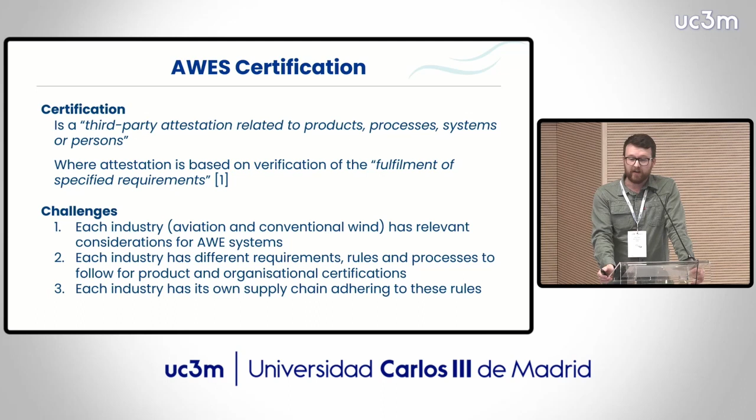So if you're drawn from each supply chain, you're likely to come into contradictions and different processes. So we wanted to compare side by side and understand where they are similar and where there are gaps. All of this is part of Work Package 5 of the HAWK project. Some of you might have already heard of the HAWK project. It's funded by the Sustainable Energy Authority of Ireland. I'm a collaborator on the project. Airborne Wind Europe are as well, and it's led by teams in the University of Galway and CTL in Ireland.

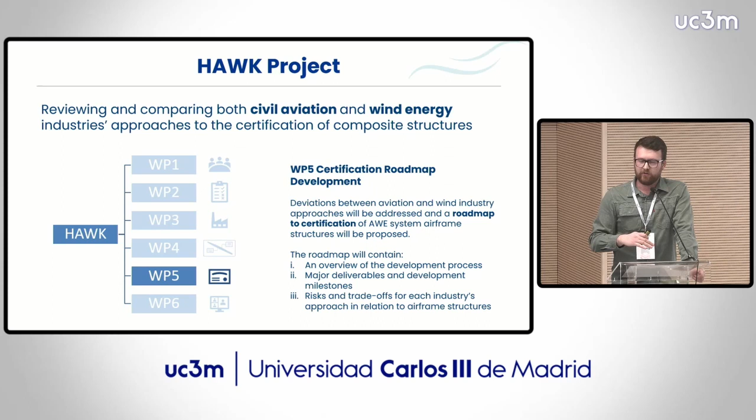As part of this work package, we set out to create that roadmap to certification, look at what the major deliverables and milestones are, and identify the risks and trade-offs for each industry's approach. But we're really narrowed in on the composite aerostructures for rigid wing aircraft. That's the overall focus of the project.

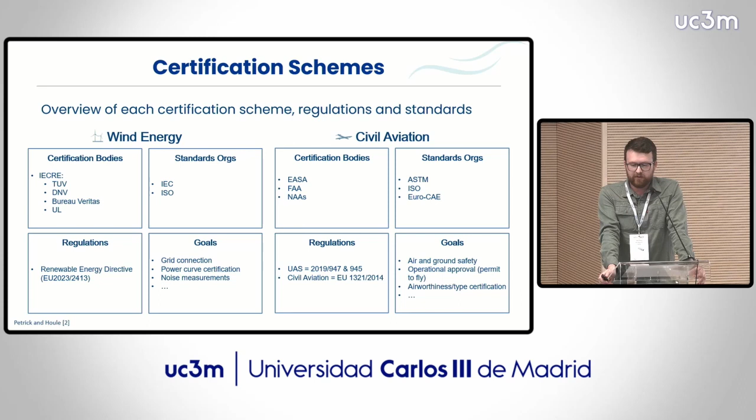And as Christian mentioned, there's a desire out there to be regulated in the IEC approach, and the IEC 61400-80 that is being assessed as a framework for going forward, that kind of process is what we followed here in this work.

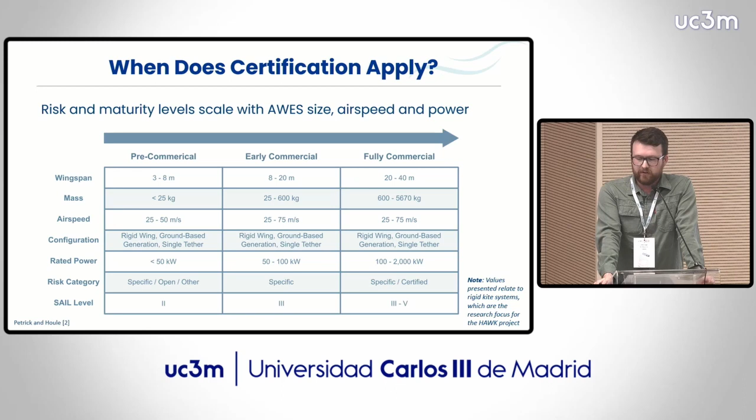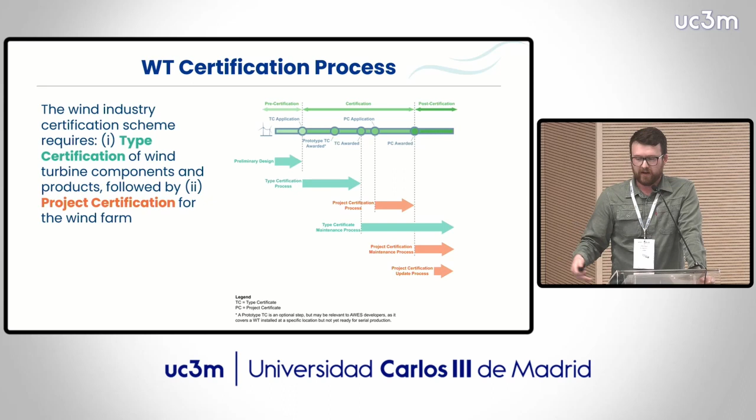So after you've done your preliminary design on your system, you move into type certification, you get your TC awarded, and after that there's a type certificate maintenance process. So every 3 years or 5 years you do a bit of an update with the IEC representatives to show that your system is still working, and if there's any issues, you've addressed them. In the meantime, you're getting into project certification for the actual wind farm and maintenance of that over the wind farm's lifetime. The process is a little bit different for civil aviation.

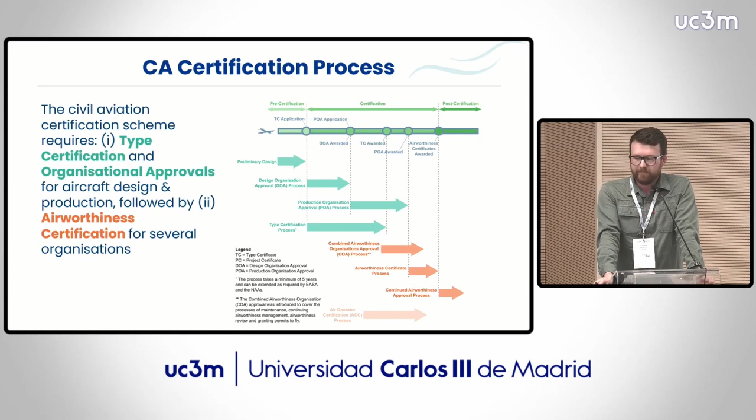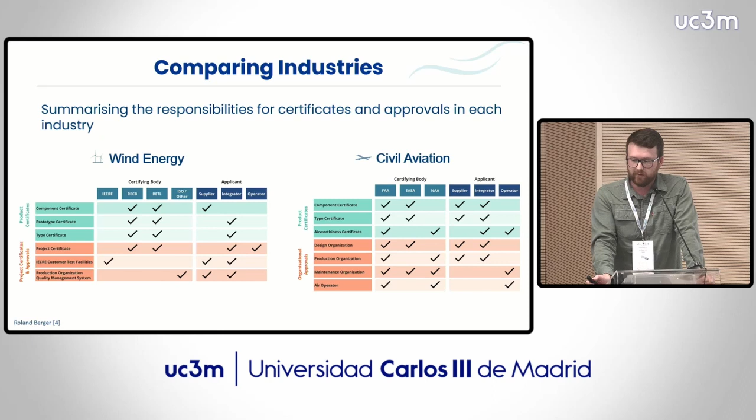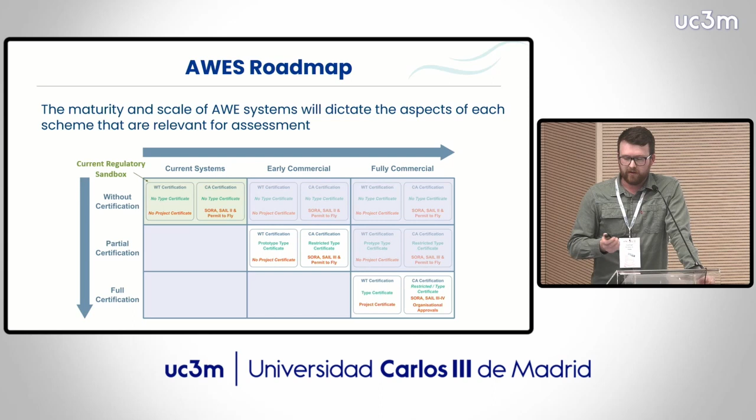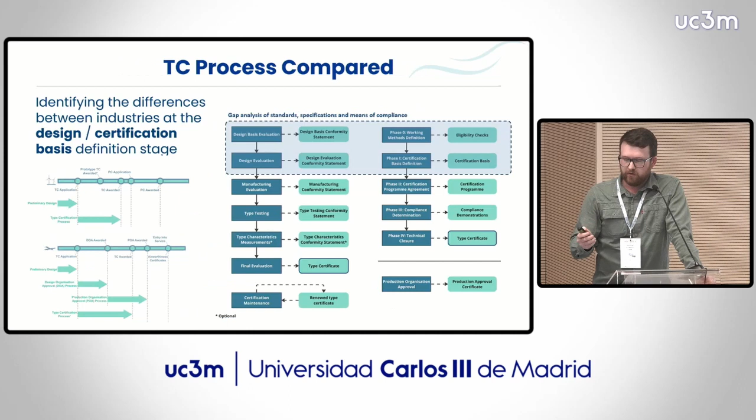What we wanted to focus on for aerostructures is doing a gap analysis of the different standards, specifications, and means of compliance that are up at the very start. So for the phases using the IEC approach, the design basis evaluation, if we go back, it's the very top left box in the left flowchart. That's broken down into a whole bunch of different phases. The first one really being identifying the codes and standards you're going to use, what your design parameters and assumptions are, and your design methodologies and principles. So on the aviation side, that could be drawing from CS-23 for light aeroplanes.

I should have said at the start, my background actually was with Ampyx Power, so some of this work started with what Ampyx were looking at in the development of their certification specs. So that's what we looked at here, CS-23 for light aeroplanes, and the acceptable means of compliance document for that is AMC 20-29. So that all relates to everything on composite aircraft structures.

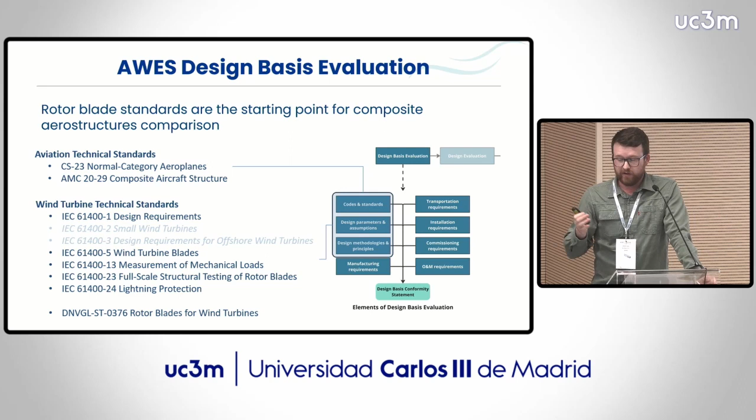The comparable standards then on the IEC are the 61400 series, and within that there's a whole bunch of different parts that all have aspects of composite structures related to them. The standard at the very bottom, this DNV one, is a nice reference point because it combines everything from the IEC standards that relate to wind turbine blades, and it's also free. So it was a handy one to start at for investigation.

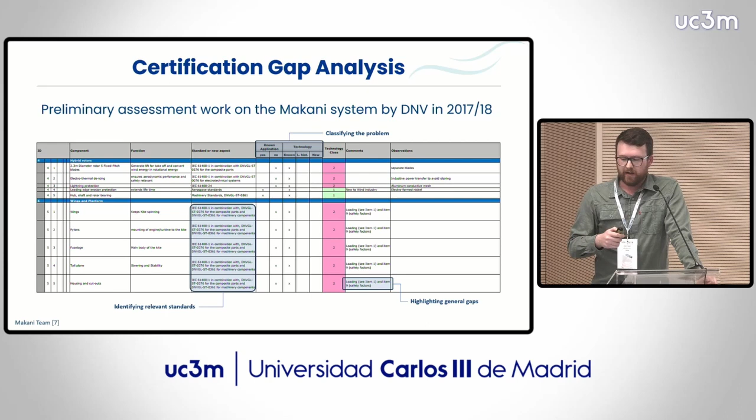And just to give a bit of background as well, this isn't the first time this side-by-side comparison of the two industries has been started. Some preliminary assessment was done by DNV, who were hired by Makani back in 2018 to look at this. It's a little bit fuzzy, just the spreadsheets that they included as a PDF. But what they've done is walk through really high-level components. So in the wings and planform section, they've identified wings as a major system, identified the IEC 61400 standard, and classified the problem, whether it was a known technology or unknown, and what the general gaps were. We really wanted to go a level past that.

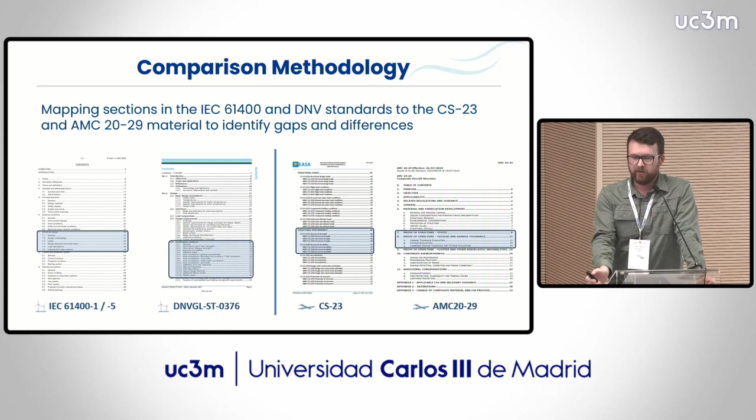So on the left-hand side, we had the IEC/DNV standards, and we're actually starting to map specific sections in each standard between the wind side and the aviation side on the right. So blowing up what was in those little tables of contents, we identify all the paragraphs and subsections on the IEC side that relate to something like material properties, and we match them up with the subparts and paragraphs on the aviation side that deal with all the same topics.

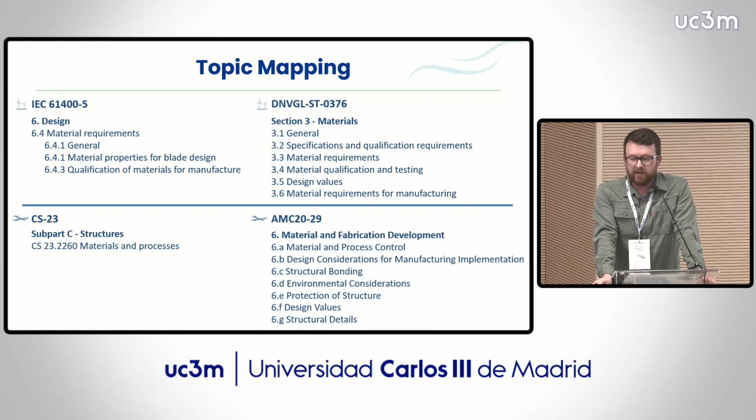So it's a big job. There's several hundred pages of documentation to go through on each of those 4 documents, or 5 if you expand out the IEC ones. But for major topics, we look at how they all compare. And really that comparison boils down to, using the IEC as the basis, where are there wind turbine gaps that need to be filled by bits from the aviation standards, and ultimately what considerations need to be made for airborne wind energy systems.

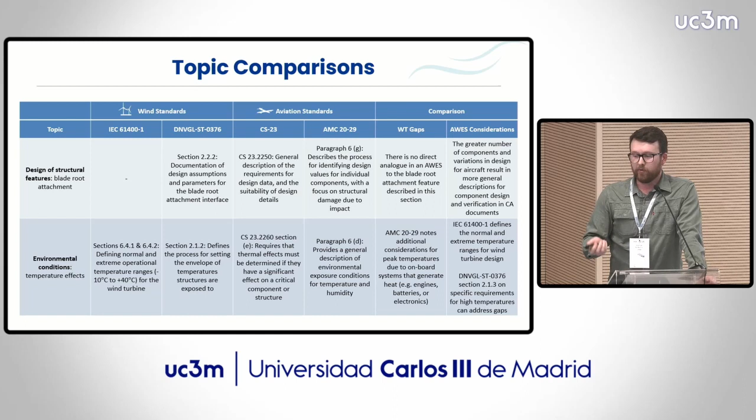A few just initial findings. I'm almost wrapped up here. On the design side, the aviation industry uses or recommends a damage tolerant design approach. In the wind standard, it's really quite different. It's material knockdown factors, generally based on statistical analysis of failures of different components.

That sort of damage analysis approach also goes to the types of failures. So on the wind side, it's fiber failure, interfiber failure, buckling, but aviation is more generally interested in characterizing damage growth, and a lot of that comes from impact damage. So that's an area that is going to need to be addressed. If you're following the IEC standard, you're going to need to understand the differences and have a methodology for how you move forward on that topic.

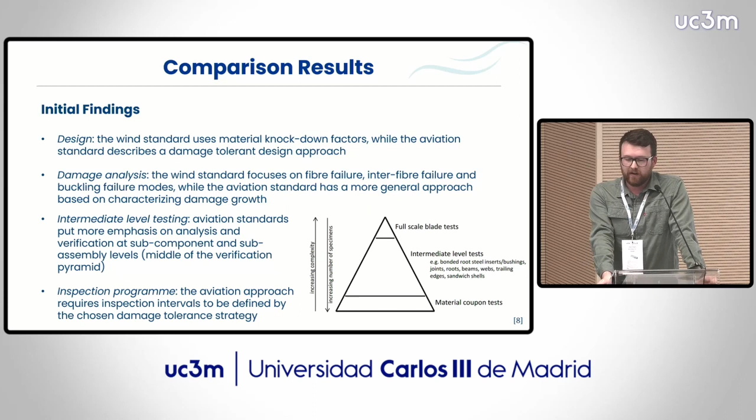And one last one just to point out, in the testing pyramid for verification, the wind standard is very much focused on material coupon testing at the bottom of your pyramid, and then full-scale blade tests to verify your overall structure. Aviation is much more focused at the intermediate level of sub-assemblies and subsystems. Wind is actually moving more towards that process, because blades are now so big, 100 plus meters long, it's hard to test a full blade for a full fatigue life. But it's an area that is treated a little bit differently.

So I'll wrap up there, it's about time, and just point out that future work is to continue this assessment of the composite structures and composite processing side, but there's work needed to maybe in the short term look at what's required for prototype certificates following the IEC standard as the lightweight version of starting this whole process, and maybe continue that gap analysis for production approval or organization approval, and ultimately for project certification and how that would look for airborne wind energy systems.